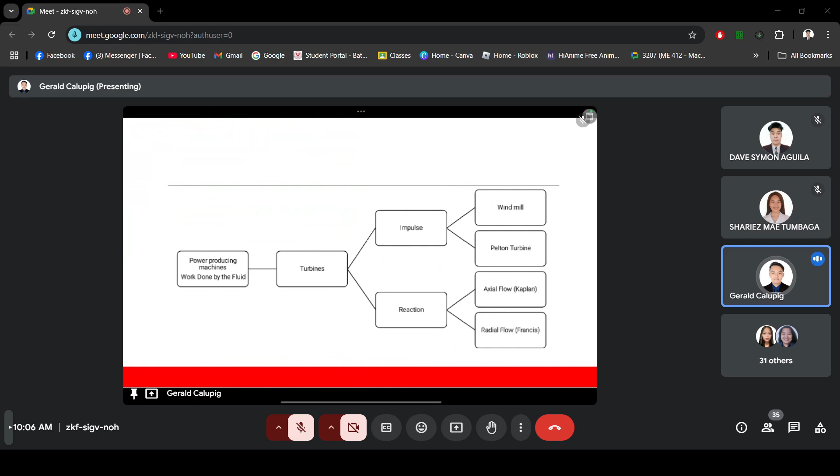The rotating element is called the impeller, which is contained within the pump housing or casing. The shaft transfers mechanical energy into the impeller, which must penetrate the casing. A system of bearings and seals is required against the leakage of the fluid.

The fluid enters the machine nearly in the axial direction at inlet through the eye of the impeller and leaves the impeller radially outward.

For the radial type of fluid machine, the fluid direction is perpendicular to the axis, and the energy transfer is centrifugal or centripetal, which results in higher output pressure, and the flow rate will be moderate.

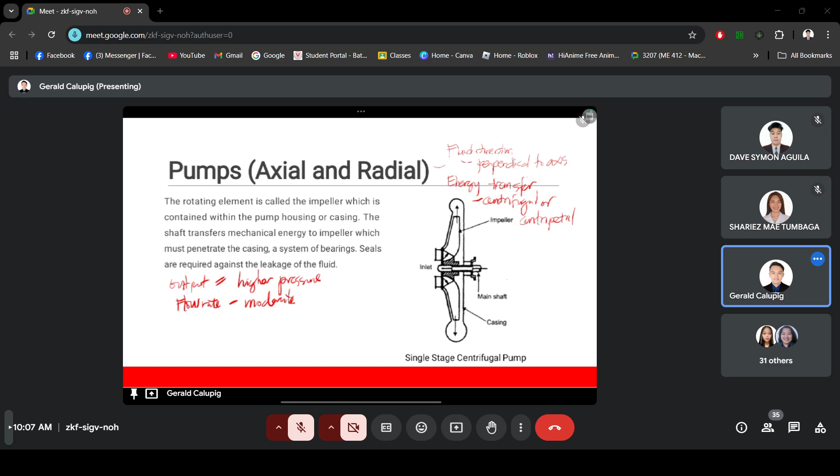In the radial type, the flow leaving the impeller is collected in a scroll or volute, which gradually increases in area, moving the fluid through the exit. The impeller has vanes to convey the fluid.

The shaft is vertical and propeller type blades are fixed to it to form the impeller. The guide blade increases the pressure of the fluid.

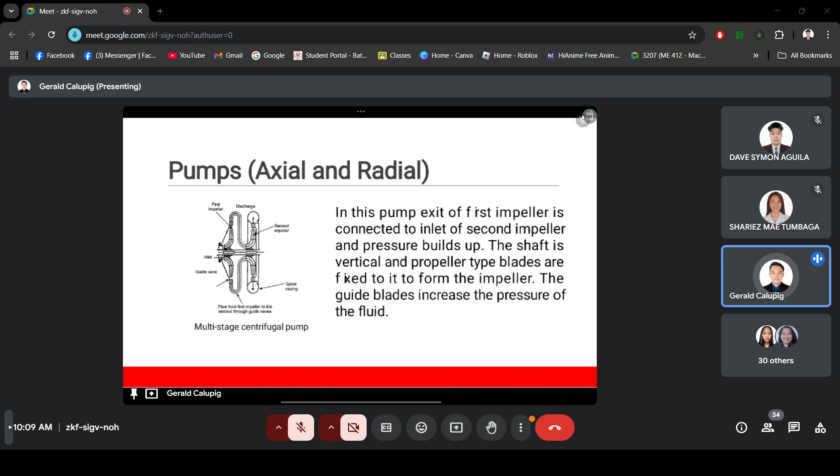Next, we have the axial pump. In the axial pump, the shaft is vertical and propeller type vanes are fixed to it to form the impeller. The guide blades increase the pressure of the fluid.

In this kind of fluid machinery, the fluid direction is parallel to the axis, and the energy transfer is lift forces on the blade, so it produces lower pressure and higher flow rate compared to the radial pump.

So we already have the comparison of the axial and radial types.

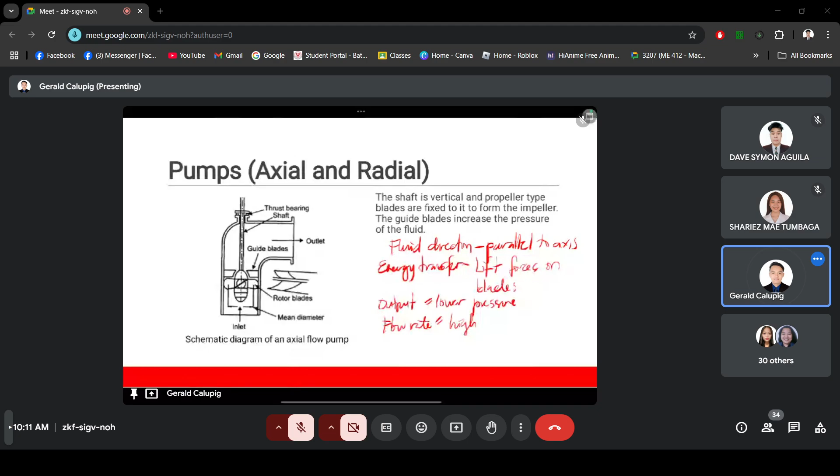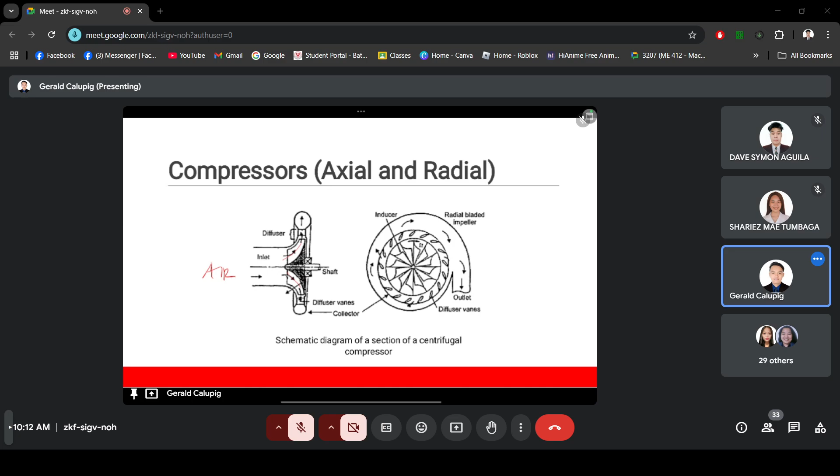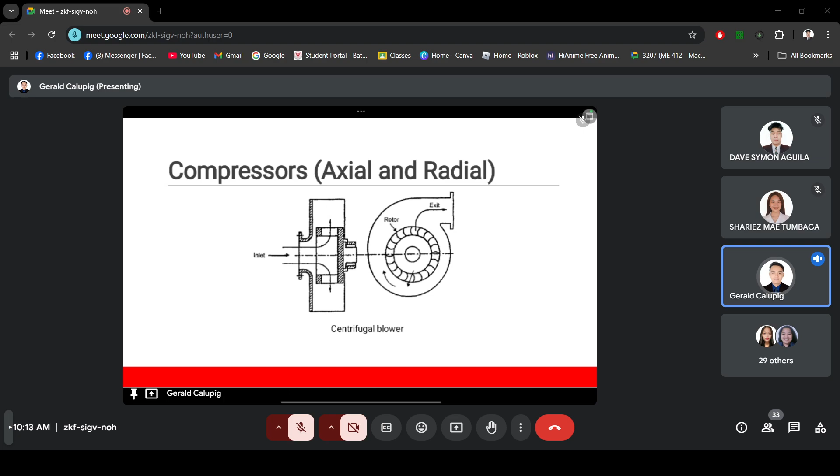The flow is parallel to the hub or shaft, or rotor axis, and maintains nearly the same radius through the stage. A typical stage consists of a row of stationary vanes and a row of rotating vanes, increasing pressure from stage to stage. The axial flow compressor is typically used in turbo engines and multi-stage compressors.

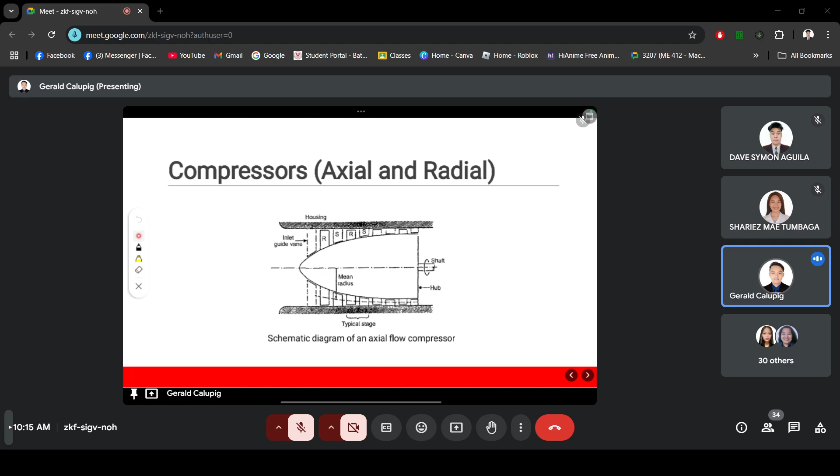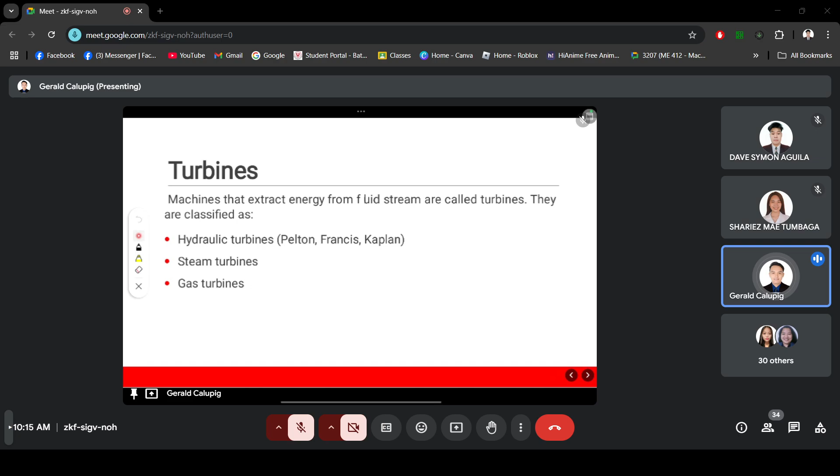Next, turbines. A machine that extracts energy from a fluid stream is called a turbine. We classify them, as discussed yesterday, based on the fluid. We have hydraulic turbines, steam turbines, and gas turbines. Under hydraulic turbines, we have Pelton, Francis, and Kaplan. In hydraulic turbines, the working fluid is water, which is incompressible.

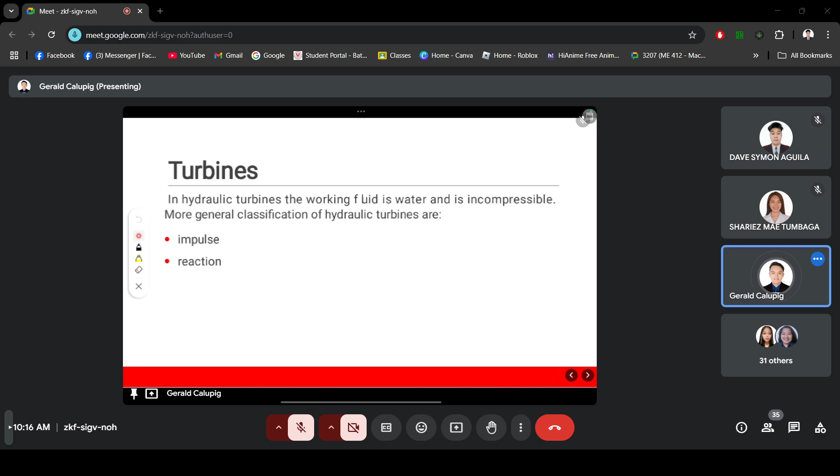The more general classification of hydraulic turbines is impulse and reaction. What is an impulse turbine? An impulse turbine is driven by one or more high-velocity jets. Its jet is accelerated in a nozzle external to the fluid wheel, known as the turbine rotor. If friction and gravity are neglected, the fluid pressure and relative velocity do not change as it passes over the blades and buckets, similar to a Pelton wheel.

The Pelton wheel is an impulse turbine. It is driven by a single jet which lies in the plane of the runner. From a penstock or reservoir, water is delivered to the nozzle or jet. This jet releases the water, and since there is like a reducer, when the water comes out it becomes powerful, creating a high velocity jet.

Possessing kinetic energy, it strikes the bucket in succession. The water takes nearly 180 degree turns inside the bucket, then falls into the tail race. There is a tail race after these turbines.

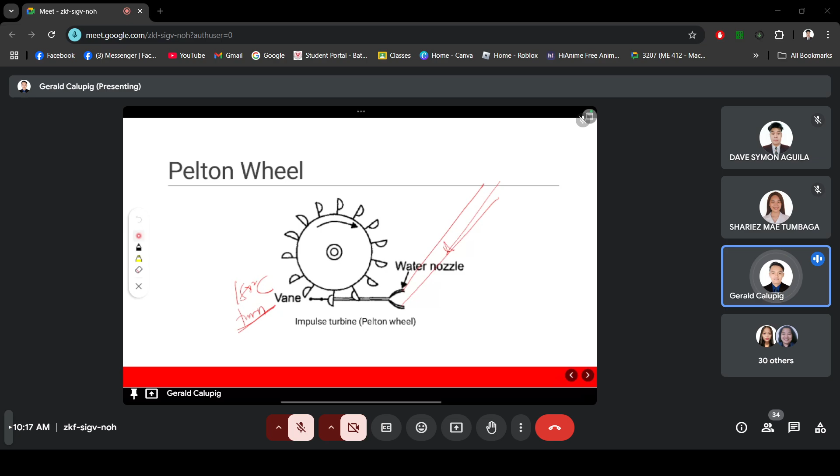Next, we have the reaction turbine. In a reaction turbine, part of the fluid pressure drop takes place externally and part takes place within the runner. We have a runner for the reaction turbine. External acceleration refers to the guide vanes, and the flow turns to enter the runner in the proper direction.

Additional acceleration of fluid relative to the rotor occurs within the moving blades. So both relative velocity and pressure change over the runner. The reaction turbine runs full of fluid, same as we discussed yesterday regarding rotodynamic free passage of fluid between the inlet and the outlet.

Here is the Francis turbine. The Francis turbine is a reaction turbine. Water enters circumferentially through the turbine casing, then enters the outer periphery through guide vanes and flows into the runner. It flows down the rotor radially and leaves axially.

Entering radially, since it varies based on radius, it leaves axially. Water leaving the runner flows through a diffuser known as the draft tube before entering the tail race. The flow is continuous here, with free passage of liquid between inlet and outlet. Any questions on the Francis turbine?

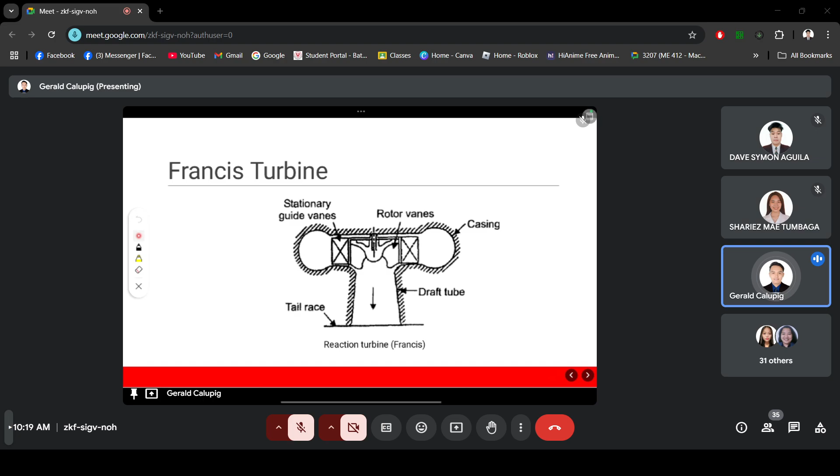If none, we will go to the Kaplan turbine. The Kaplan turbine is also a reaction turbine. Water from the spiral casing enters the guide blades, similar to the Francis turbine. But while in the Francis turbine the water goes straight, in the Kaplan turbine it strikes the blade, of which there are 4 to 6 blades.

The Kaplan turbine consists of an axial flow runner with 4 to 6 blades of an airfoil section. In this turbine, both guide vanes and moving blades can be adjusted, so high efficiency can be obtained. Otherwise, it is similar to the Francis turbine.

Pinagkaiba nila is yung Francis is radial, ang Kaplan is axial.

Yesterday, we also discussed the steam and gas turbine, no? Daanan na din natin. Ang steam turbine, in steam turbine, expansion of high pressure and temperature is expanded in fixed and moving blades of a turbine. The steam is produced in high pressure boiler, and after expansion, steam condense sa condenser, no? Paano kapag gas turbine naman?

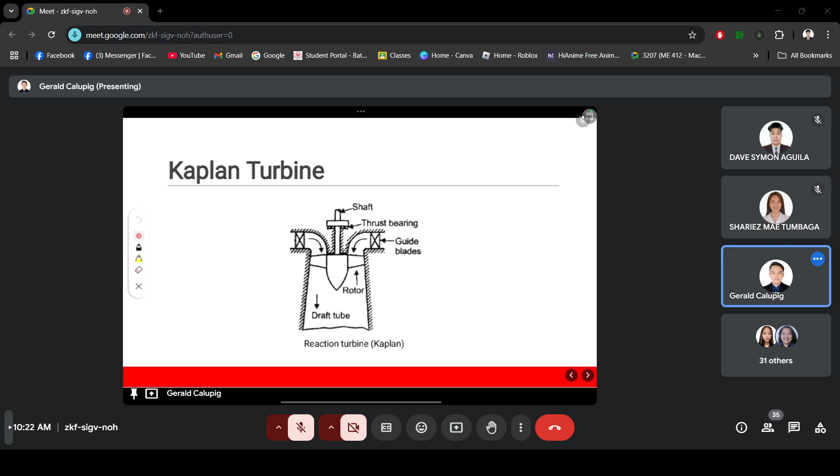If wala, we can proceed to the Euler theory applied to turbo machine or fluid machinery.

Euler's theory, the fluid flow through an impeller of a centrifugal pump. According to Euler theory, torque applied on impeller is the rate of change of angular momentum of the fluid passing through the impeller. But we need to have the following assumptions: velocity of water is uniform at inlet and exit of the impeller, and the relative velocity at inlet and exit are tangential to inlet and exit tips of the vane.

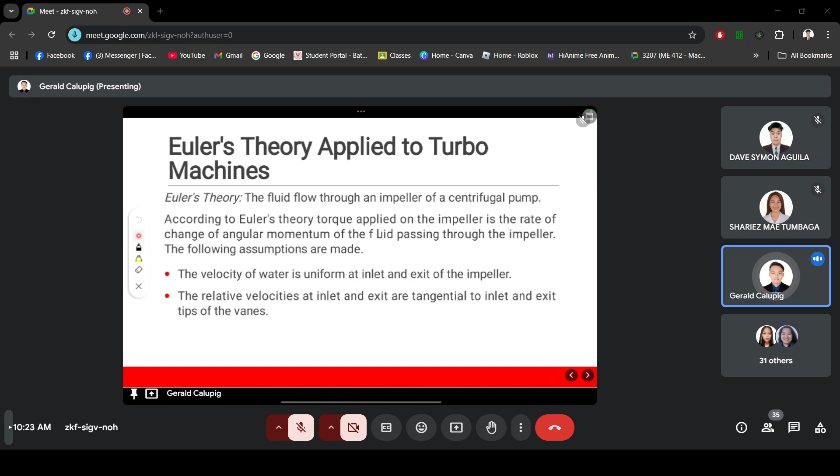This is again a similar discussion from our last semester, the Euler theory applied to fluid machinery. So we have here the velocity diagram of the impeller. If you remember this diagram before we use this for our turbines, we will also apply this to our pumps, so we can have a holistic calculation and understanding of the pump construction and analysis, right?

So kapag papasok yung fluid sa impeller natin, it will hit the R1 or the radius 1. Siyempre, pupunta siya doon sa inlet. So it will have a V1 or absolute velocity of the impeller entering the impeller at radius 1. Next, kapag siya is at the exit, we will have also another radius, or we can have an absolute velocity of fluid leaving at the impeller here at point 2, since this is the radius 2 or the impeller tip.

Also we have the relative velocity based on what you call this, machine elements, the velocity triangle. You have a velocity, relative velocity at inlet, the VR1, with an angle of beta.

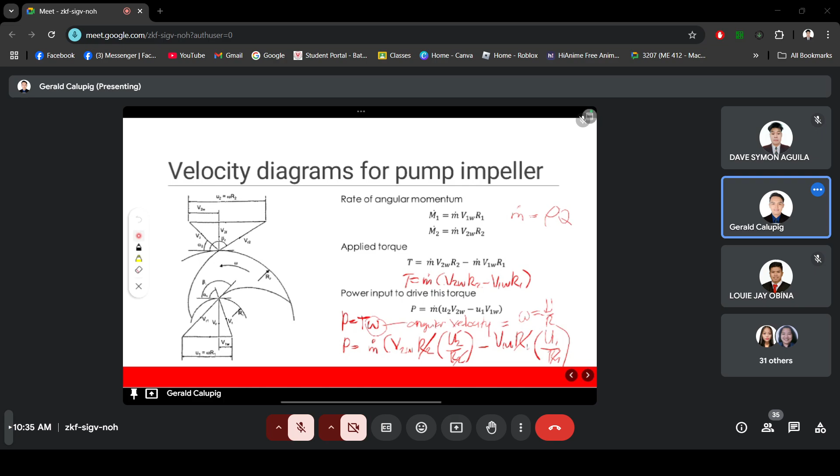Next is the Euler head. For the Euler head, we need the assumption that the whole of mechanical power is converted into hydraulic power, then the total head H will be given by the relationship: P equals the specific weight times Q times H, where Q is the flow rate and gamma is the specific weight of the fluid.

We can have H, or the total head, equal to U2V2W minus U1V1W over G. Or the Euler head is equal to U2V2W minus U1V1W over G.

But if the head available is actually less than the Euler head, and if the water enters the impeller without whirl, we don't have V1W, so V1W will be 0. Then the Euler equation, if the water enters the impeller without whirl, we can have the Euler head as equal to U2V2W over G.

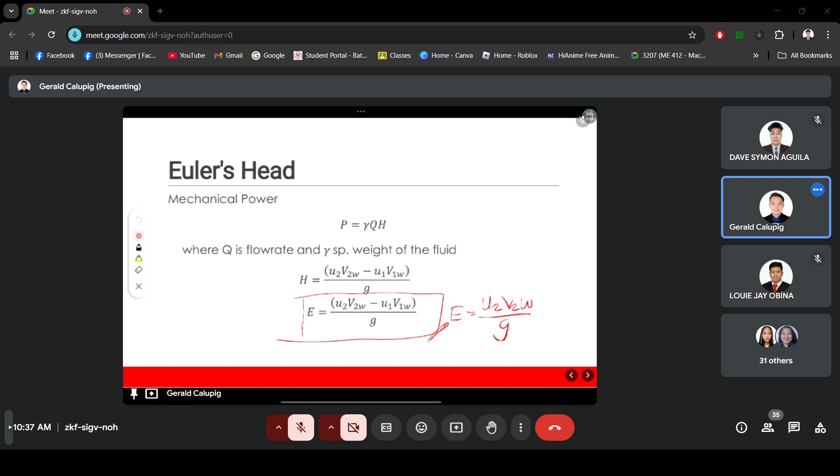Next is the Euler equation in kinetic form. It is very useful to express Euler head in terms of their absolute velocity rather than their components. So we can have the relationship: V1W is equal to V1 cosine alpha 1, and meron din tayong relationship na V2W is equal to V2 cosine alpha 2 from our discussion earlier, as derived using the cosine rule.

Using the cosine rule, we can have VR1 squared is equal to V1 squared plus U1 squared minus 2U1 V1 cosine alpha 1, and VR2 squared is equal to V2 squared plus U2 squared minus 2U2 V2 cosine alpha 2. So if you will get U1V1 cosine alpha 1, you can get one half times U1 squared plus V1 squared minus VR1 squared, and U2V2 cosine alpha 2 is equal to one half times U2 squared plus V2 squared minus VR2 squared.

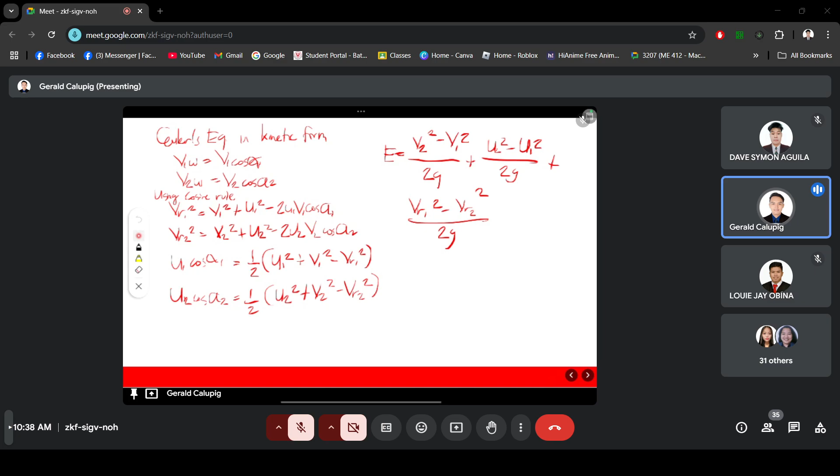So you can get this equation: the Euler head is equal to V2 squared minus V1 squared over 2G, plus U2 squared minus U1 squared over 2G, plus VR1 squared minus VR2 squared over 2G.

Kung mapapansin ninyo, yung first term denotes the increase in kinetic head of the fluid. It is denoted as the kinetic head of the fluid in the impeller due to change in absolute velocity. Kaya ang ginamit natin is V2 and V1.

Sa second term naman, it represents the energy used in the fluid in circular motion about the impeller axis. Since ang ating tangential velocity is U2 and we have setting fluid into circular motion, ang ginamit natin is U2 and U1. Then in the third term, since that is regain static head lang, we have also the reduction in relative velocity, VR1 minus VR2, magkabaligtad since reduction yung sinasabi natin.

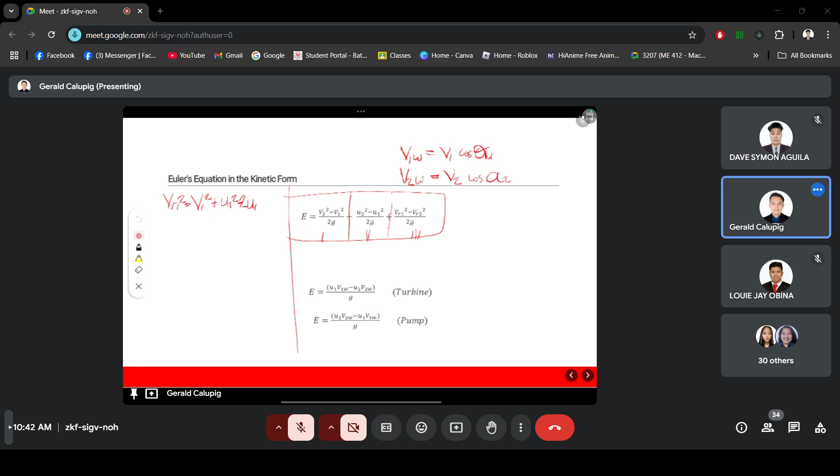Kapag axial flow machine naman, we can have equal ang tangential velocity since that is axial, wala namang angle kapag axial since that is perpendicular. So we can have U1 is equal to U2 is equal to U.

We can have E is equal to U1V1W minus U2V2W over G, or we can have E is equal to U times V1W minus V2W over G.

And for the pump, E is equal to V2W minus V1W over G times U, or the tangential velocity, for the axial flow machine.

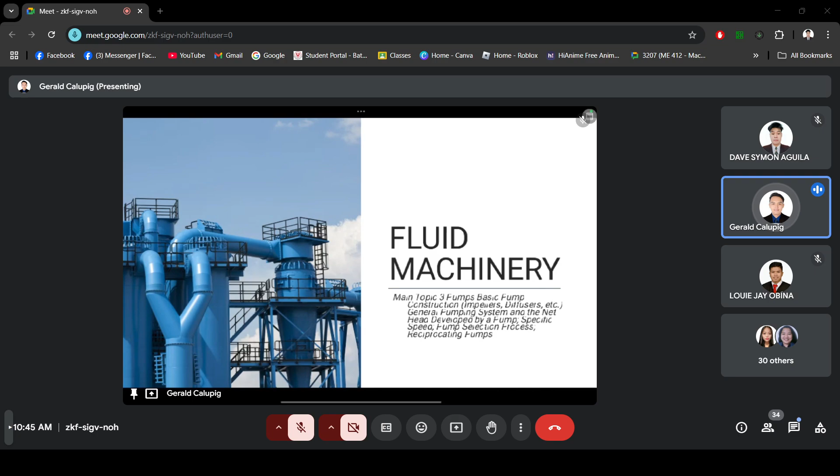So we already discussed the pump and the turbine configuration. In general, pumps add energy to the fluid, they do work on the fluid. Opposite with the turbine since turbines extract energy from the fluid, the fluid does work on them.

So turbo pumps are used to raise the level of potential energy of the fluid, and are widely used in hydro and thermal power plants, chemical industries, buildings, and deep wells. They have relatively few moving parts and reasonable efficiency.

As explained earlier, the turbo pump is a power absorbing machine, which means it requires a driver like an electric motor, or some pumps are driven by a generator coupled to them, especially for fire pumps, which are typically or ideally coupled to a generator.

Why? During fire, there is a possibility of power interruption. If the fire pump is directly dependent on the power supplied by the concessionaire or the power distribution company, your building could burn down if it's not bypass or independent. Since our target during fire is to extinguish it during emergency, we use a generator directly coupled to the fire pump. That is the example - it's not always a motor, sometimes it's directly coupled to a generator.

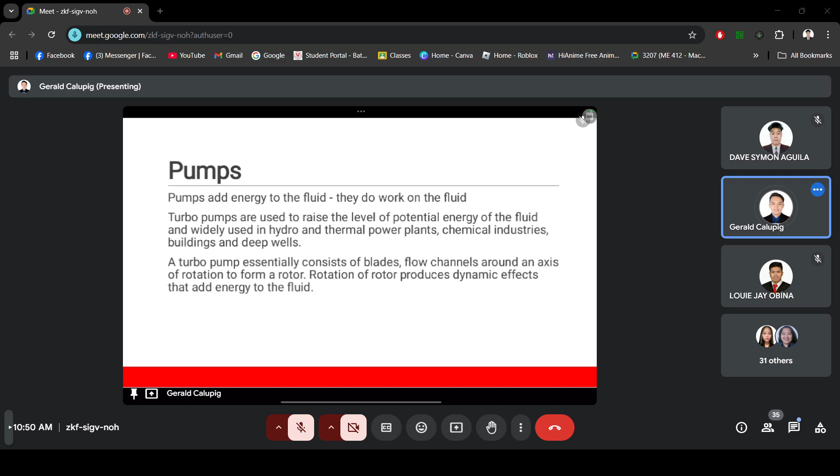Since it is rotodynamic, it has a casing and an impeller. The impeller is attached to the rotating shaft, and there's a stationary casing or housing or volute enclosing the impeller.

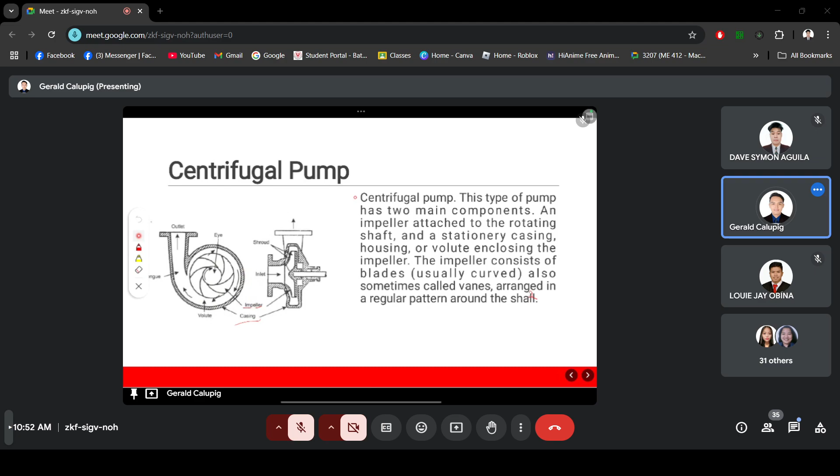Nasa likod, backing at the end, at the back, no? Pero yung harap niya, yung other side is open, no? Walang casing siya. Unlike dito sa shrouded impeller, no, yung another type where the blades are covered on both hub and shroud end. The shrouded impeller will have no peripheral leakage since meron siyang cover, both hub and shrouded end. So we have two impellers - open and shrouded impellers for the centrifugal pump.

Okay, so for the pump impeller, we can have a single or double suction. For the single suction impeller, the fluid enters through the eye of one side of the impeller, whereas for the double suction impeller, the fluid enters to both sides of the impeller. The double suction type reduces the thrust on the shaft. Kapag double suction, dalawa ang kanyang entering, dalawa yung humihigop. Kapag single lang, isa lang.

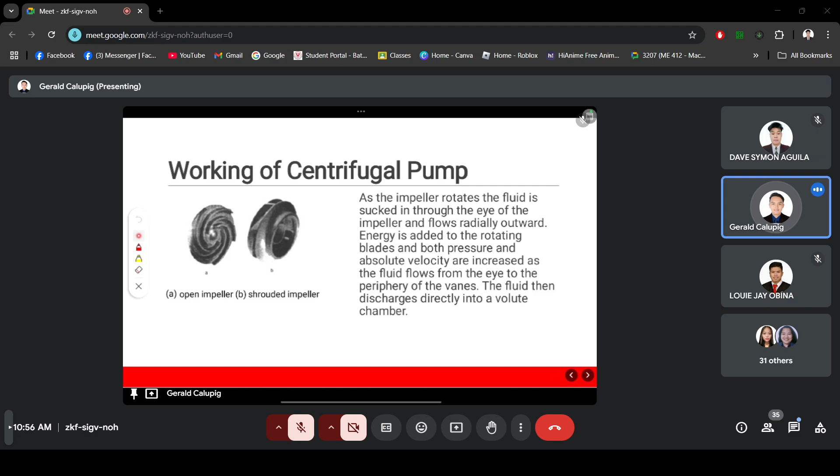The flow rate is the same for each stage, but the pressure rises in each stage. Therefore, at the end of the last stage, a very large pressure or head can be developed by the multi-stage pump. Okay, any question? If none, we will proceed to the analysis.

So for the idealized situation, in which there are no losses, the theoretical pressure head across the pump is given by the Euler equation. We can have E is equal to U2 V2W minus U1 V1W over G, right? Same derivation as kanina, from the law of cosine. We have VR1 squared equals U1 squared plus V1 squared minus 2 U1 V1 cosine alpha 1. And for the relative velocity at the...

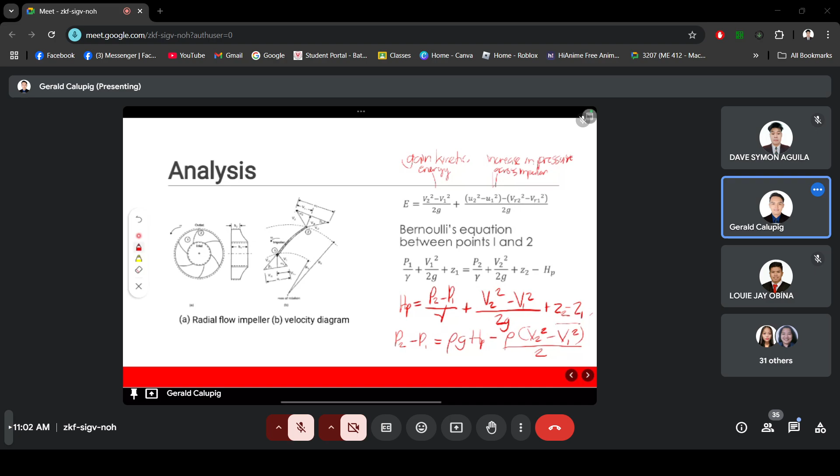So, in the best design for a pump would be one in which the angular momentum entering the impeller is zero, so the maximum pressure will rise.

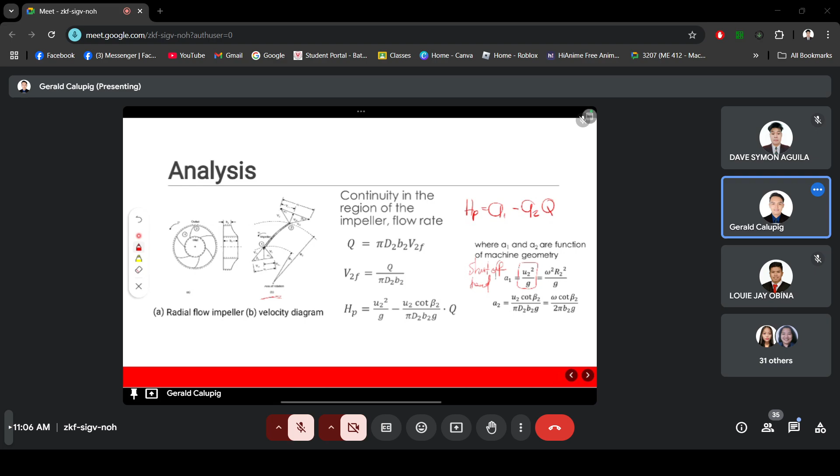Any question po? If wala, we can proceed to the next slide.

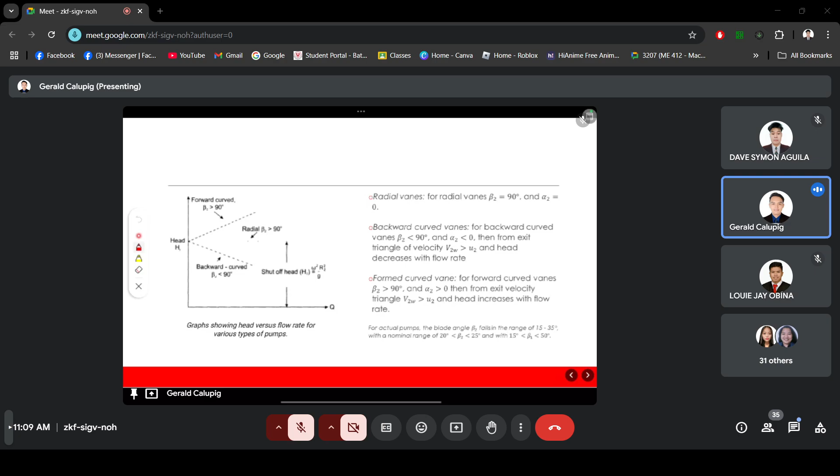Any question po? Next is we have the effects of blade angle beta 2 on the exit velocity diagram. So lahat ito is naka-sub 2. If you can see in the figure, pwede ba natin palakihin ito?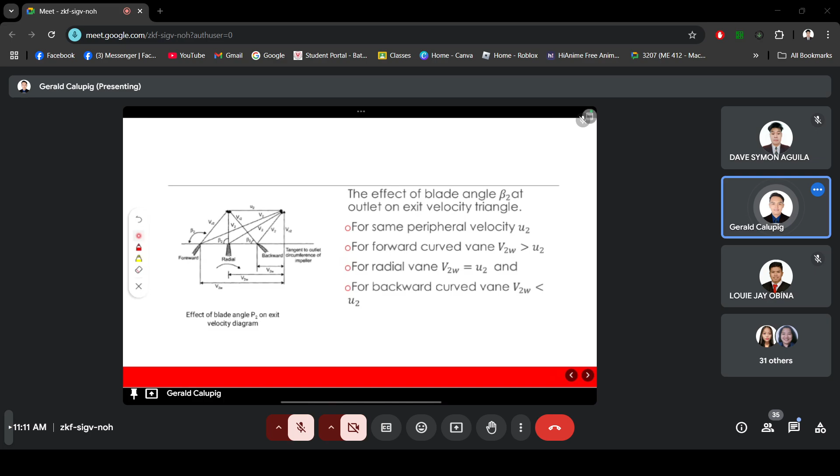Sa theoretical head, no? For the real flow, theoretical head cannot be acquired in practice due to losses in pump. Of course, there is always losses, no? It's either the friction loss, or if there is a leak. So we can have actual head is equal to theoretical head minus the hydraulic losses, no?

For the efficiency, hydraulic efficiency, you can have what? The hydraulic efficiency is defined as the ratio of actual head to theoretical head. So we can have hydraulic efficiency is equal to H over HT, or if you want it longer, specific weight times Q times H over specific weight times Q times HT, where H natin is yung actual, HT theoretical, and HF natin ay hydraulic losses.

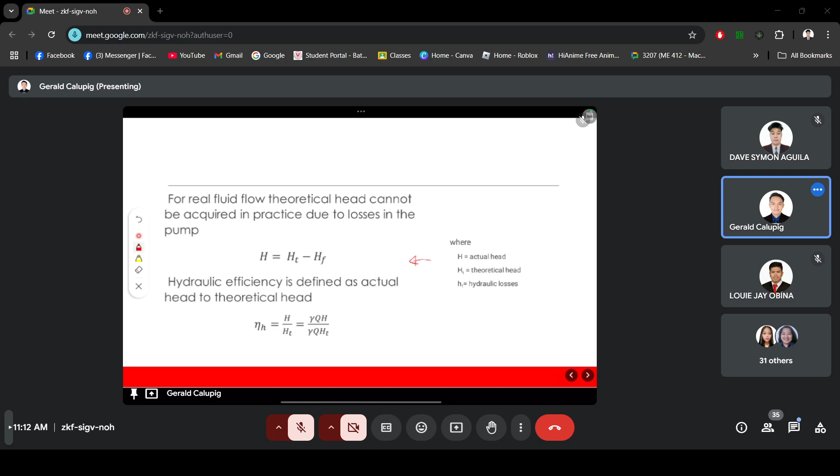Okay, for mechanical efficiency, ano naman ang formula natin for mechanical efficiency, no? Mechanical efficiency is output of pump divided by input shaft power. We can have the mechanical efficiency is equal to specific weight times Q times HT over torque times angular velocity, which is yung power, no?

Then, kapag overall efficiency naman, efficiency is defined as the power output divided by the power input. So we can have overall efficiency is equal to specific weight times Q times H, H ito ha, yung actual head, over T times W, the torque times the angular velocity. Following yung relation niya with the specific, ang tawag dito overall efficiency, we can have overall efficiency is equal to the hydraulic efficiency times the mechanical efficiency.

Dali lang, no, pagkuha ng efficiency. Ang mahirap lang is pagkuha ng head, since you will use a variety of formulas. Okay, any question po? May question pa po ba?

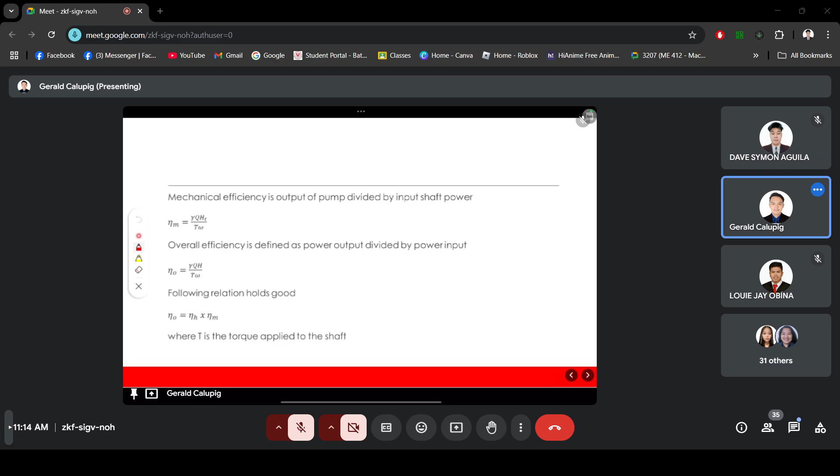Next, we have the specific speed, no? It is possible to correlate yung mga fluid pumps natin, or pumps, to a given family of dimensionless number that characterize its operation. So such a number is termed specific speed and given by: specific speed is equal to angular velocity in radians per second times square root of flow rate over GH, raised to 3 over 4.

Kapag pinahanap tayo ng value ng specific speed, you will also identify kung ano siya, kung siya ba ay radial flow pump, mixed flow pump, or axial flow pump, using these values. The value of angular velocity is usually based on the motor requirement and values of Q and H, at maximum efficiency. The type of pump is selected based on the value of specific speed, no?

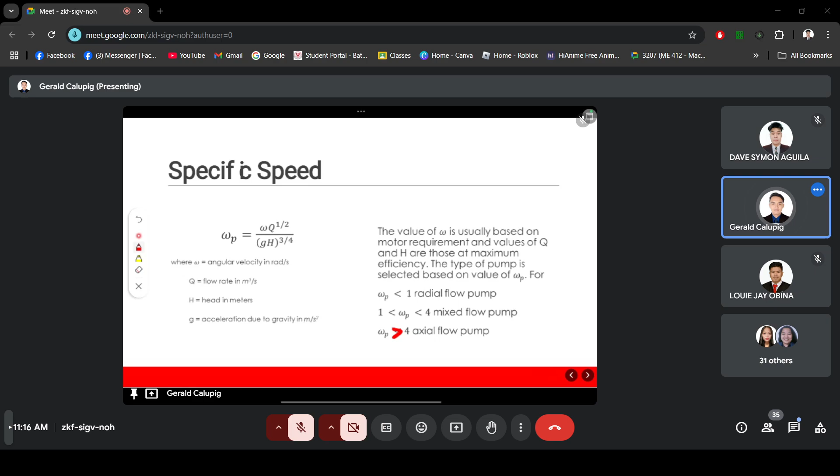Any question po from our discussion? Next week, we will discuss the cavitation and net positive suction, as well as the pump in series and parallel configuration. We can also have the matching pumps to the system's demand and the actual flow pump. And after that, we will have our problem solving - a lot of problem solving, right?